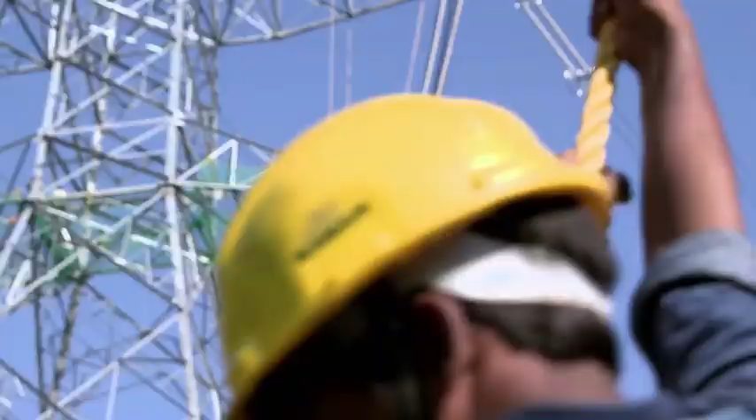Over 3,000-meter high mountains, 1,150 transmission towers, over 5,000-kilometer long aluminium conductors, one helicrane, $450 million, and the impossible deadline of just 36 months. It will take the most out of the men and the machines to brave the wind, snow, storms and slopes,

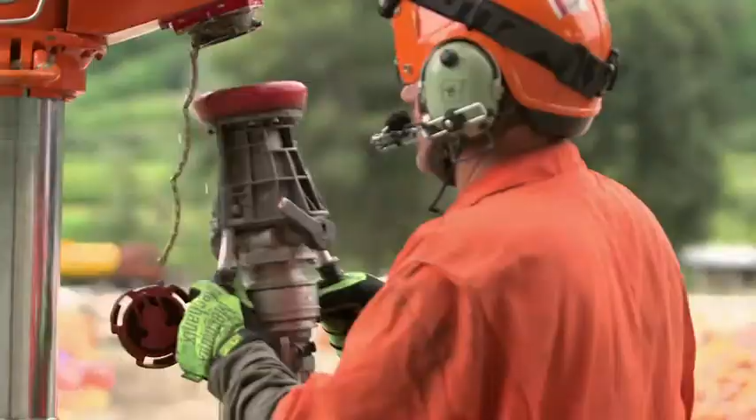and to bring light to some of the highest villages in the Himalayas. This is the ultimate joint venture between man, machine and mountains. This is the beacon of hope and light. The corridor to Kashmir.

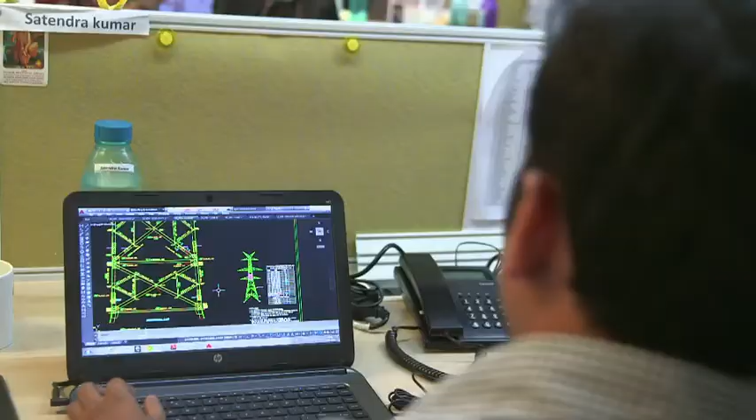India's northernmost state, Jammu and Kashmir, surrounded by the magnificent Pir Panjal Mountains. These steep slopes are an impediment to any construction project. But now, a team of designers, engineers and construction workers has decided to take on the challenge and forge a 415-kilometer long transmission line and bring reliable power to Kashmir.

On an average, around 12 million Kashmiris suffer almost 70 days of blackout in a year. During winters, temperatures can plunge down to less than -13 degrees, making life difficult. Currently, the old transmission corridor runs from Moga in Punjab and ends just ahead of Jammu at Kishanpur. Landslides, rockfalls and heavy snow often disrupt the old transmission line, plunging large parts of the state into darkness.

But electrifying Jammu and Kashmir is a tough challenge. The government has just 2 bidders for the project. The mountainous terrain is tough to conquer. During winters, the high snow and cold winds make working impossible, and security issues often plague the politically volatile state of Jammu and Kashmir. STERLITE Power, with a promise to deliver the project 12 months ahead of schedule, wins the bid.

No one wants to address the tough challenges. No one wants to connect Kashmir to the mainland with a 400 kV line over the Pir Panjal range. And these are some tough challenges that we are accepting, because we believe that if no one does them, then we'll never have a real economic energy market in our country.

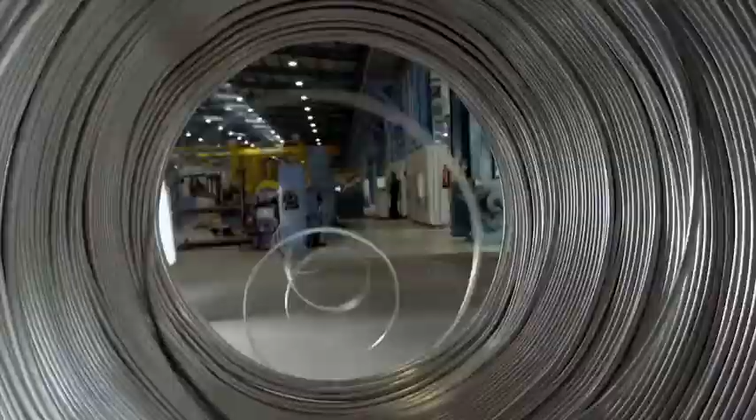The company is just 6 years old and has been in the business of connecting towns and villages through power lines. Its experience of manufacturing cables and conductors and of building power lines from Maharashtra in the west to Assam in the east will certainly come in handy.

But the geography of Kashmir will be the biggest challenge for this young company. We asked ourselves that is there no way to do this project in, let's say, half the time. See, it was very easy for us to take the full 6 years. In fact, if we took 9 years, it would not be unheard of. But where's the fun in that? We said that let's take this project, let's take it as a challenge that we have to deliver electricity for the people of Kashmir in as little time as possible.

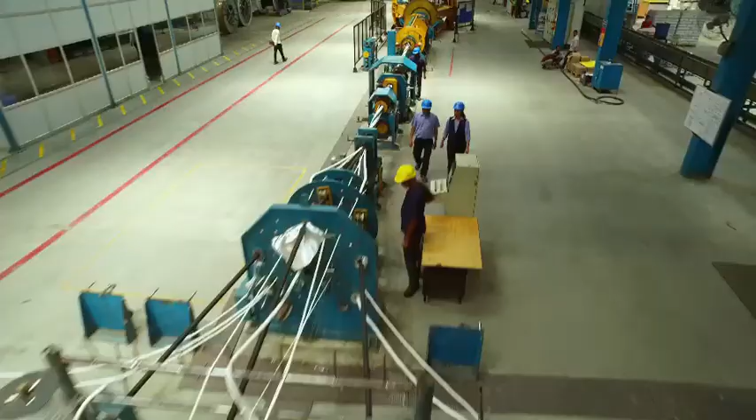This new corridor to Kashmir will consist of over 5,000 kilometers long heavy gauge conductors running in 12 parallel lines. These overhead high power transmission lines carry a fearsome 400 kilovolts of charge and will rest on over 1,000 tall, heavy reinforced metal transmission towers.

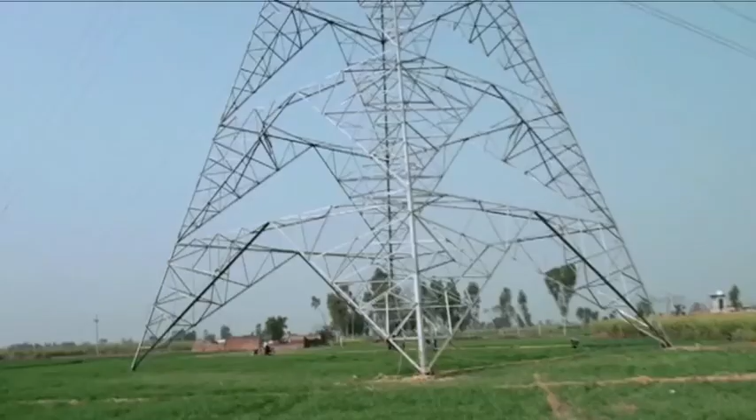The first phase, the Jalandhar-Samba line, is being built predominantly on flat land, and it's plain sailing for the team, who lay out this section in record time, 12 months ahead of schedule. But building the remaining two-thirds is the Herculean task. The Samba-Amargarh line has been built on these treacherous slopes of the Pir Panjal range. As far as the planning is concerned, the first thing goes the identification of the location.

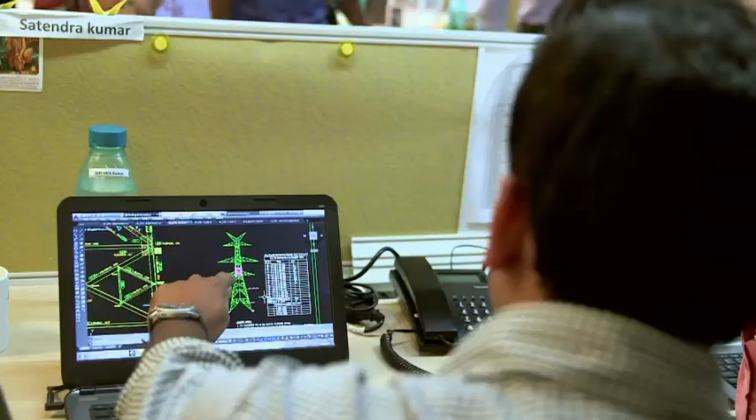Once the location is decided, the type of tower for that particular location is considered after engineering. The design team has to factor in the elevation of the slopes, the altitude, and the snowfall pattern, and tweak the design and weight of the towers.

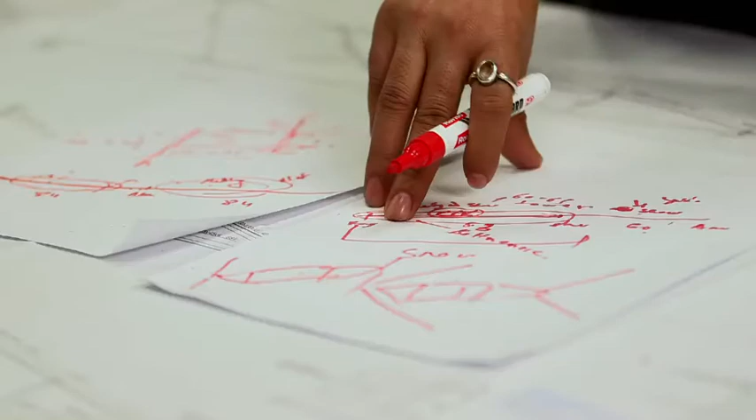As we're talking from Samba to Amargarh, there are 4 sections we've divided: Akhnur and Rajouri, then Shopian, then to Amargarh. In these 4 sections, this is the portion which is non-hilly and without snow, this is hilly without snow, this is hilly plus snow, and this is semi-hilly with snow.

So in this hilly and semi-hilly snow area, we need to design the towers in a way that we can club this together. The team is using 4 different types of towers to match the topography and the angle of the slopes.

For this project, we considered the wind zone at a higher level - the wind speed in the area is 39 meters per second, but we considered 44 meters per second. We also increased the snow thickness consideration to 16 mm on the conductor and tower material, generally it's 10 to 12 mm. We kept it on the higher side, which automatically covers the seismic load on the tower, since it's a pin joint structure and the seismic loads are easily transferred to the ground.

In the complete line, we are using more than 1,000 towers through different geographical areas. Some are in heavy snow zones, some in medium snow zones, and some in non-snow zone areas. In heavy snow zones, we use grade C material and extra weight, so our tower will not be brittle in negative temperature, and will not buckle in any condition.

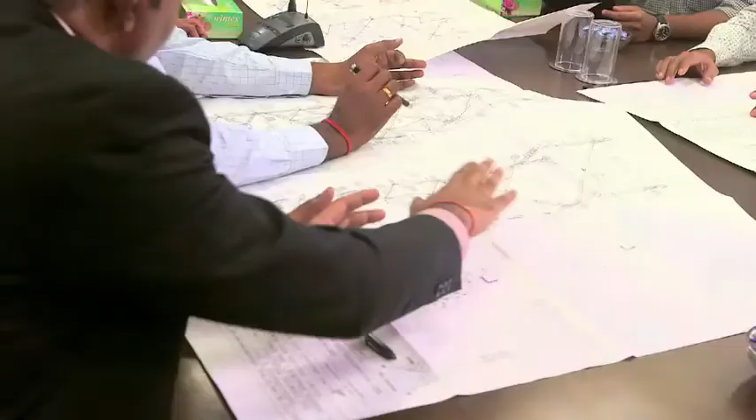The team meets in the boardroom to finalize the plans. The altitude of the mountains and the snow conditions are the big impediments to the project.

Pratik Agarwal, Sterlite Power's Chief Executive Officer, is taking keen interest in the project. The reliability, not only for 35 years, at least 50 years this line can serve Jammu and Kashmir and the nation.

But there is a huge operational problem to be overcome. Considering the size of the project, I think the material movement for the foundation as well as tower erection will be the biggest challenge.

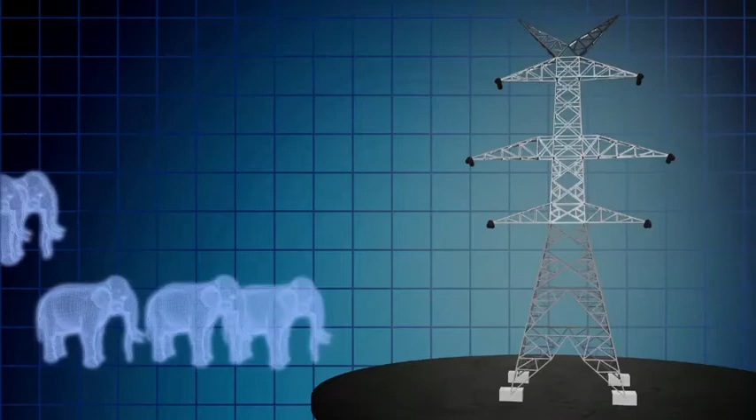How is the team going to get the material up the mountains? The traditional method of using mules to shift material is slow and cumbersome, and each transmission tower can weigh a mammoth 46 tons - that's like hauling 9 reluctant elephants up the slopes.

You will be surprised to note that 5,000 mules working 24/7 was in all the consideration. Being a project director, I was thinking, what's happening? Well, there is planning for the man, material, jeeps, tractors, excavators - these are required. But the mules? The land route with sometimes non-existent roads is too time-consuming.

So the engineers look to the air for a solution. This is perhaps the most difficult transmission project ever undertaken in this country, and we believe that if we can execute this project in much faster time than it has ever been executed, we can execute any other project in this country.

From this value proposition, what we want is to bring in the best technology in the world to complete this project within the time frame. From this perspective, we want to bring in a helicrane, because after scanning all the technologies available in the world, I believe this will add the most value to our ambition of executing this project.

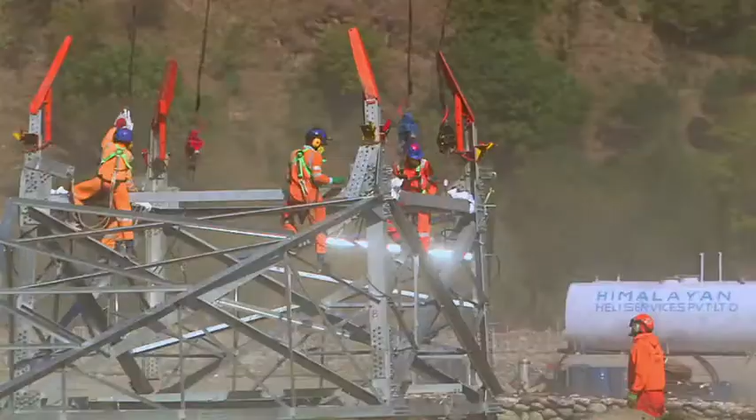Sterlite Power has taken a calculated risk and ordered a helicrane from Erickson. The helicrane, or S-64, is a monster helicopter that carries an enormous weight of up to 9,000 kilos.

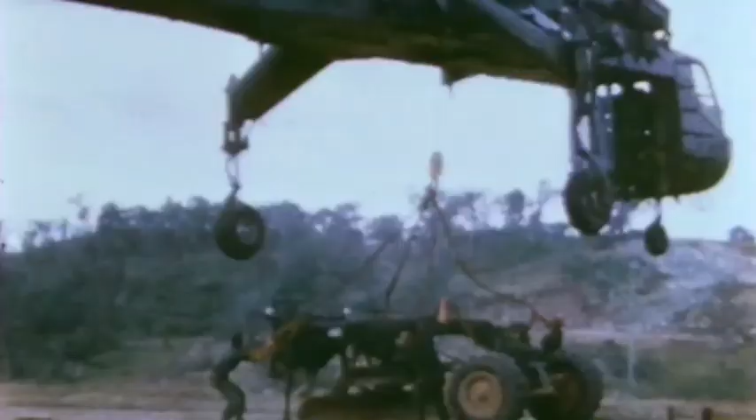Its forerunner, the CH-54 Tarhe, a Vietnam War hero, was invented in the early 60s by Sikorsky Aircraft and used by the US Army.

Today, the technology is primarily for civilian use, and Erickson Air-Crane owns and operates the largest fleet of S-64s, leasing them out for mega building projects worldwide.

Can the helicrane be the answer to conquering the slopes of the Pir Panjal? And can it help build a corridor in record time before winter falls?

The biggest challenge that we have is working on these humongous mountains in only 3 months. We have only a working window of 3 months, and the only way to do so much work is by using the technology of aviation - that is how the very idea itself was one big challenge.

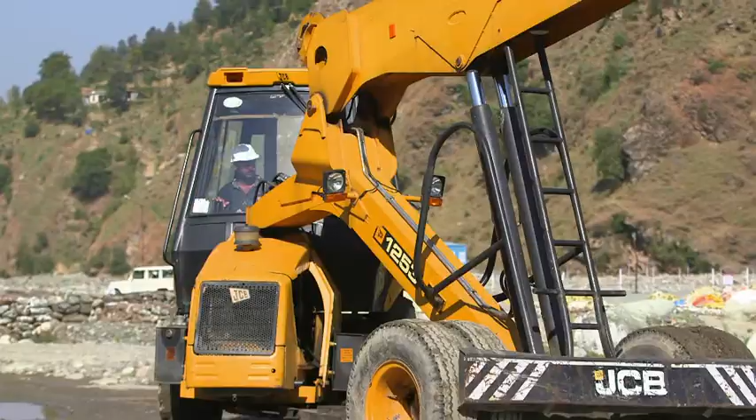Action now shifts to Bafliaz, near Poonch, very near the line of control. This is the operations base from where the team hopes to conquer the Pir Panjal range. Security is tight, as this is geographically the widest place in the area, with proximity to the road, so the entire stock inventory can easily be brought in. The area also has a high presence of Indian forces, giving the base extra security. The team has all its equipment here: cement, sand and gravel to lay the foundations of the towers, and a whole host of metal stubs that will form the legs of the transmission tower.

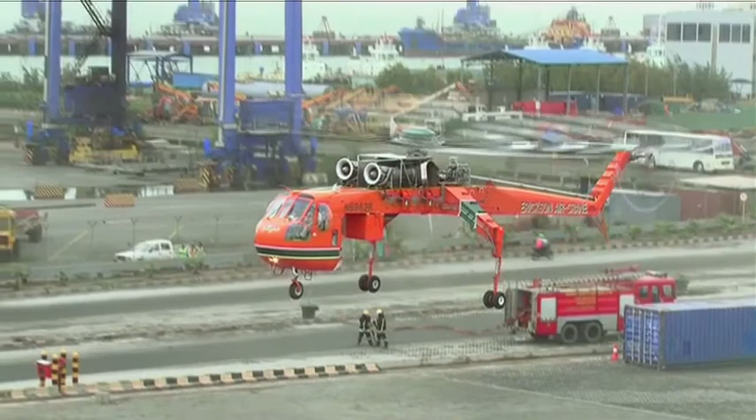Meanwhile, far away at Mundra port in Gujarat, the Erickson helicrane is finally off the ship. It's come from Australia. The flight engineers check the machine, and hey presto, it's liftoff and time to head towards Kashmir.

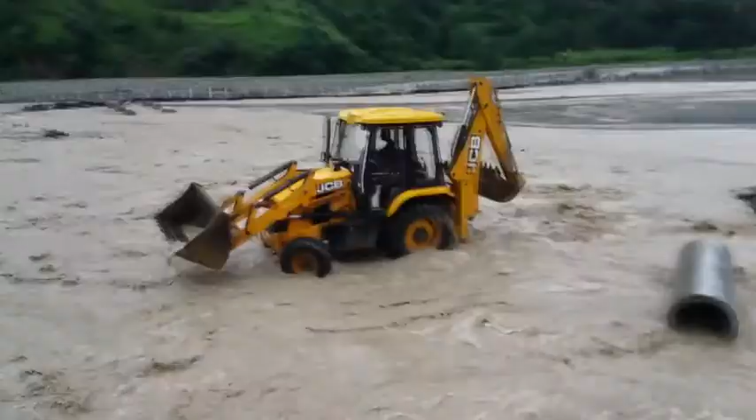But back in Kashmir, work comes to a standstill. Disaster has struck the operation headquarters. With the nerve center down, precious time is being lost.

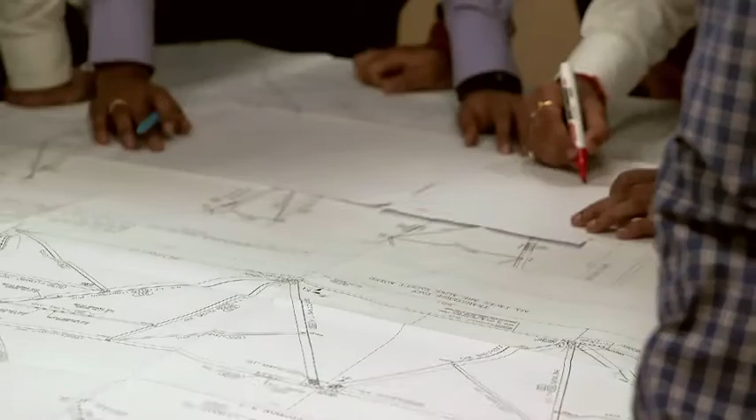Connecting Kashmir to the central electricity grid is a mammoth undertaking. This team has hired a helicrane to help conquer the Pir Panjal mountains. But days before its arrival, disaster strikes.

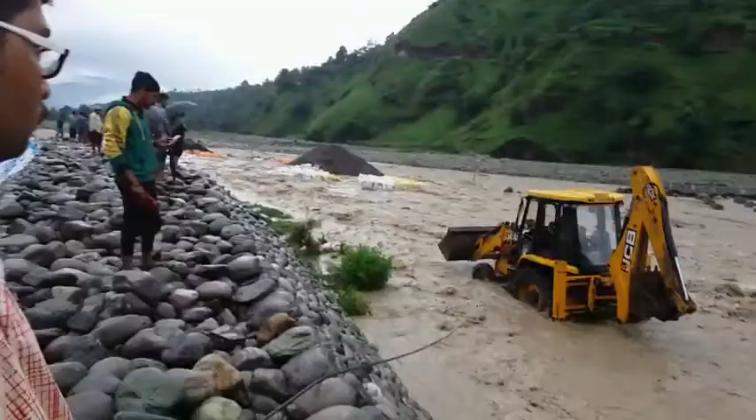The effort to bring power to Kashmir has suffered a setback. A flood in the adjoining river has inundated the operation headquarters. The months-long hard work in setting up the base has been washed away. The crew is safe, but the entire yard is a complete mess. What was once a parking zone is now a river.

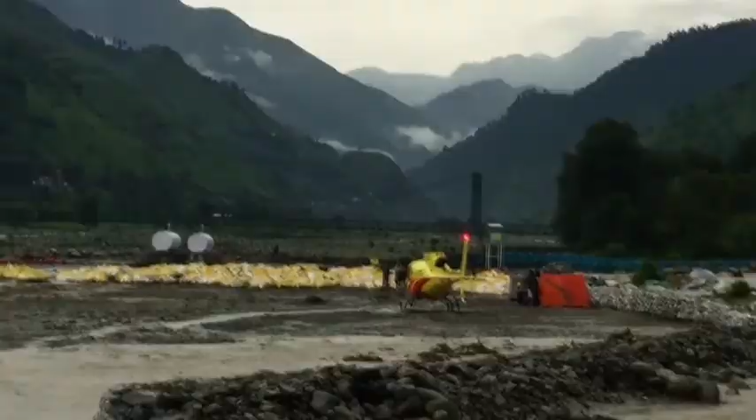The team does its best to salvage what they can. The living quarters are no longer habitable. The B-3 helicopter, on a trial run, is quickly dispatched back to Srinagar. The crew don't want to take any chances.

The challenge was to make this yard available for the Erickson by July, and we had a flood in between, so I have to remake the whole yard.

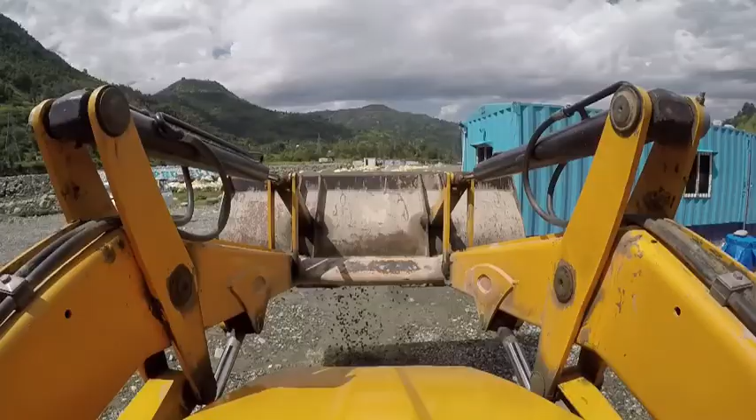Meanwhile, the clock is ticking away. The team reviews the flood damage and decides to set up base at the same place. The operation headquarters has to be up and running before the helicrane arrives. This team has a deadline to meet and no time to waste.

In a matter of just three weeks, the yard is reconstructed. The team invites the local army commander for the inauguration. The operations base is now ready to welcome the first sortie of the heli crane.

This is the magnificent heli crane. She's named Olga, which means holy in Russian. She looks like a slim grasshopper, but she is no lightweight. She is powered by twin heavy lift engines.

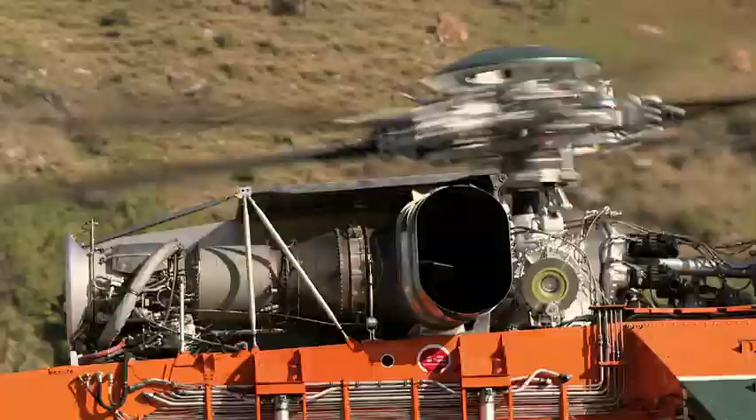She doesn't come alone. She's followed by her support crew in the B-3 helicopter. This is the first time a sky crane has been used in a construction project in India, and the team believes that she will be a game changer.

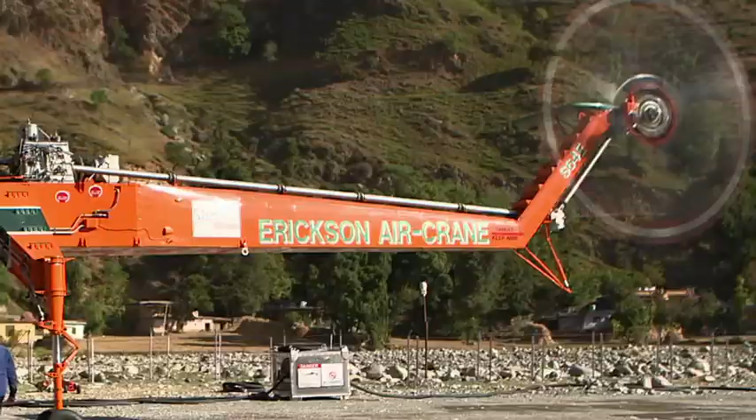The Olga is an experienced workhorse. She has over 54 years of experience working across the world, and now she intends to queen over the Pir Panjal range.

The Olga comes at a steep price and costs thousands of dollars per hour. Clearly, the team believes that the price is well worth it. It is one of the largest projects being financed in the state of Jammu and Kashmir in the history of India.

So it was fairly difficult, and the technology and the complexity of the terrain that we had to go through made it even more difficult.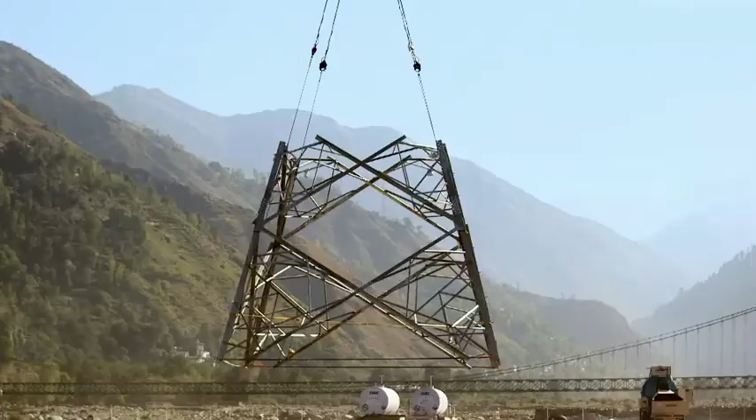This sky crane is the team's secret for beating the project deadline. It can lift up to an enormous 8,000 kgs of weight, compared to 40 kgs per man per day.

We're here in Bafliaz, India, to do a power line construction project for STERLITE, and we're in the process of moving steel, concrete, and gravel to the tower site.

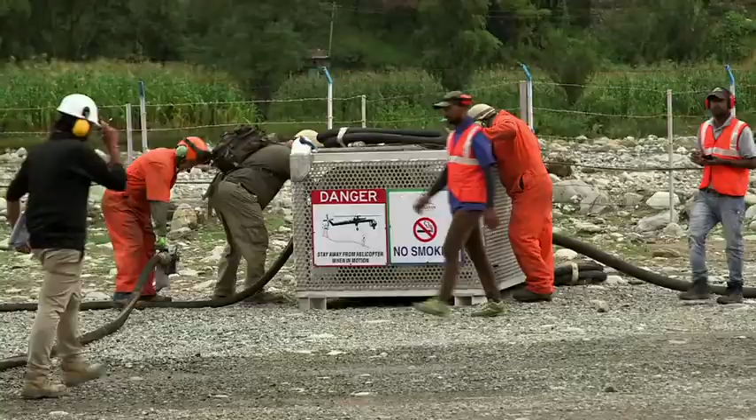The sky crane comes with a highly specialized crew of 10 people, pilots and engineers, plus a crew who will manage the ground operations. The Erickson crew is an experienced lot, but it's clear that working on this project is not going to be easy.

The ground team needs to learn what it means to work with the heli crane and quickly put systems in place.

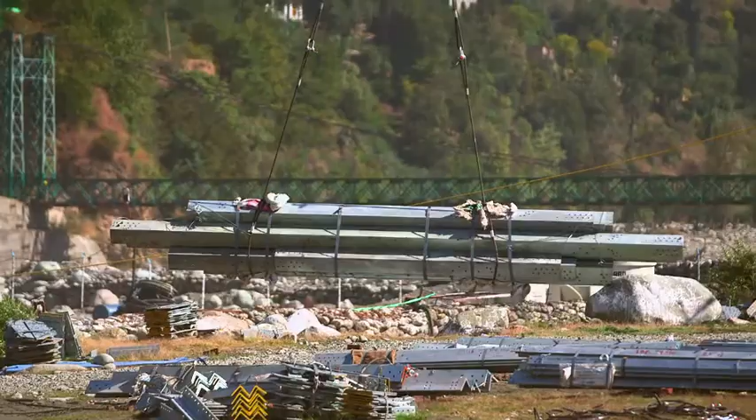At every landing and takeoff, the powerful six-blade rotors of the heli crane kick up a veritable storm, so tankers are called in to sprinkle water to keep the dust down, for visibility is key.

The noise of the rotors is deafening, and the safety officer keeps a check to ensure that everyone is wearing safety helmets, goggles and ear protection gear.

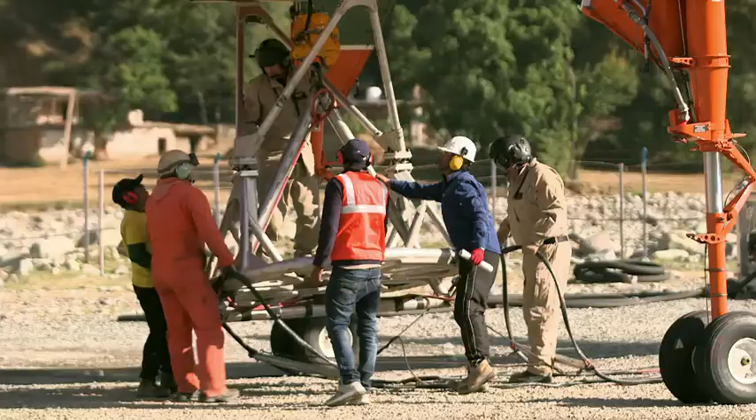The air crane comes with a variety of attachments to carry different kinds of loads, which makes carrying cement, gravel and steel an easy task.

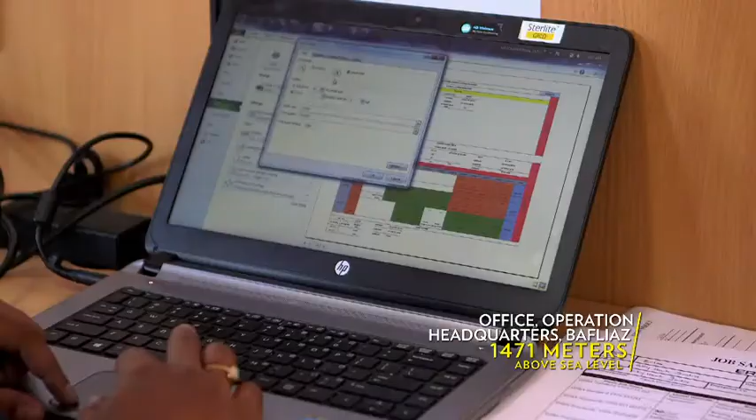Here we shift steel bundles with the help of a sky crane at locations very far from the access road. Sitting inside the site office in a converted container, the team plans each sortie carefully, keeping in mind the latitude, longitude of the drop zone and the temperature of the day.

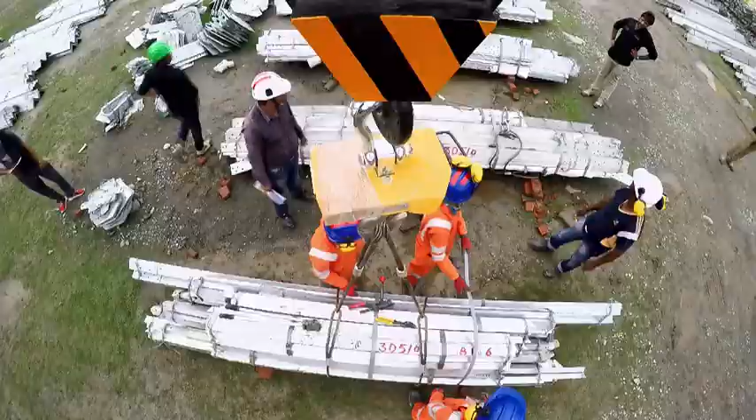Hourly weather updates to check the wind and visibility in Srinagar, Pir Ki Gali and the drop zone is crucial in deciding the weight for bundling. Today, the yard crew has been asked to bundle all material under 4 metric tons.

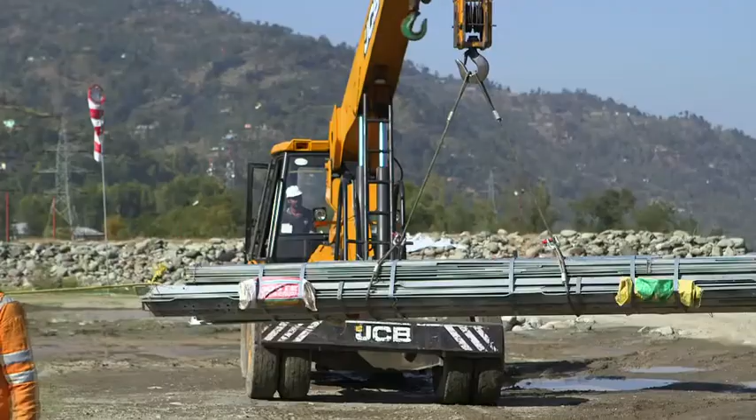But as the weather deteriorates in the afternoon, the calculations have to be revised. The hard work of the morning will have to be redone and the bundle weight recalibrated and remeasured for the next sortie. Nishant Gupta, Sterlite Power's project manager, knows that ignoring the weather or the weight changes can jeopardize the safety of everyone aboard the heli crane.

Looking at the terrain, because there are a lot of challenges with the machine, it cannot lift more than 6 metric tons on these terrains because it's from 8,000 to 12,000 feet.

Then we changed our plan from erection to more of bundle shiftings, or maybe we did much of dry material shiftings plus steel bundles. So we changed the entire setup, and our target was like 4,500 metric tons. As on that, I think we are targeting 4,200 metric tons, or maybe we can do more than that.

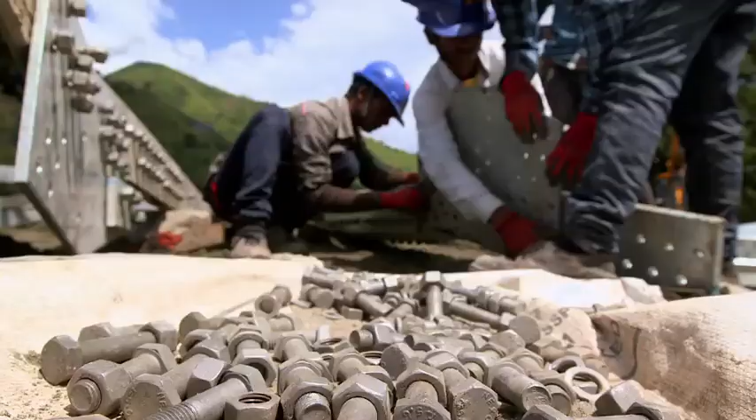It's September. Weather is disrupting work at the sites. Today, the team at the operations yard has been waiting for the sky crane since early morning. But bad weather at Pir Ki Gali Pass means it's stuck at Srinagar.

Meanwhile, 62 Romeo is going to take off, and by the time it gets to Srinagar, that means we'll be ready to work by 10, 9:30, 9:45. But 9:30 comes and goes, and there is no sight of the sky crane.

Helicrane is coming from the Pir Ki Gali, that is 12,000 feet altitude. Some days it's not coming because the weather condition is bad.

Major constraint is the weather condition here, vulnerable weather condition. If you look in the morning, it will be a very sunny day. After 12, it will be very tough, cloud will be there, and the visibility will be less for the construction. Weather on the Pir Panjal range has a lot of local variations.

Sometimes the wind conditions or visibility change rapidly, making the team scrap their entire plans for the day. One of the things that we have to watch out for is the weather closing in behind us or in front of us and everything. So to be cognizant of where you're at and what the weather is going to be doing, and try to outguess it and work with it.

Safety, because you've got to be safe. If you can't see what you're doing, don't be there.

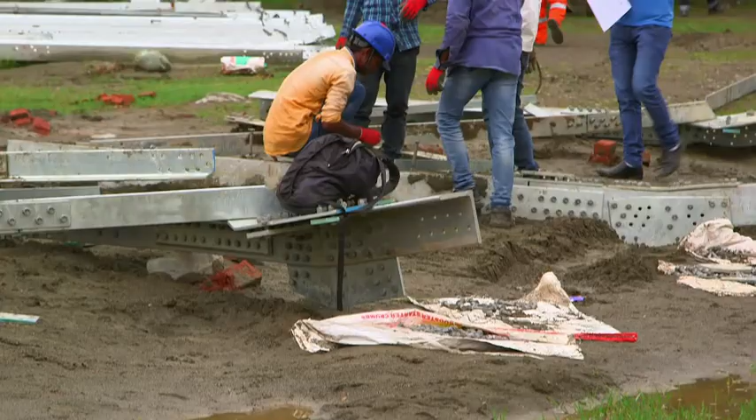By mid-September, work on the project nearly comes to a halt. The monsoon winds are playing spoilsport, and the helicrane has been stuck at Srinagar airport for the last week. The weather here has been quite difficult. For the last week, we've been shut out.

This time of year, I understand, in this area is quite moist. We get a lot of thunderstorms building up and a lot of fog, which we're unable to operate in. The Erickson support crew at the yard keep themselves busy, tinkering with the Olga and making sure she is in perfect shape.

The problem we have right now is the weather's not cooperating. As far as being able to give an actual time, I can't. If we get some good days, Sterlite will be able to see what we actually can do, how much production we can put into a day. I look forward to that day. I hope that day is tomorrow. But to give an actual time on when we'll be done, I can't give that.

Mother Nature. The terrain makes its own weather, and the weather is one of the things that we have no control of, and we have to work with the weather.

The team is under pressure. They need to finish before winter approaches with its snowfall and windstorms. The team has to win the battle against time, terrain and weather if they are to keep the promise and complete the Corridor to Kashmir project ahead of time.

The heli-crane has hastened the building process, but it's been out of action for the last week because of bad weather. With work stalled, the team is under pressure.

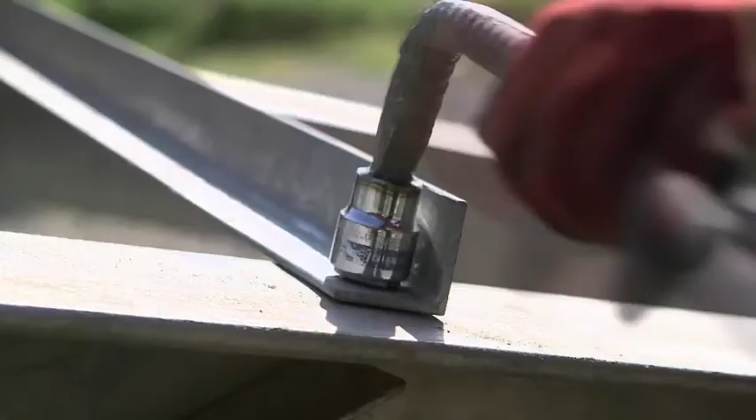It's October. With the monsoons over, work on building the transmission towers gathers full speed. The team will have to race ahead to meet their deadline.

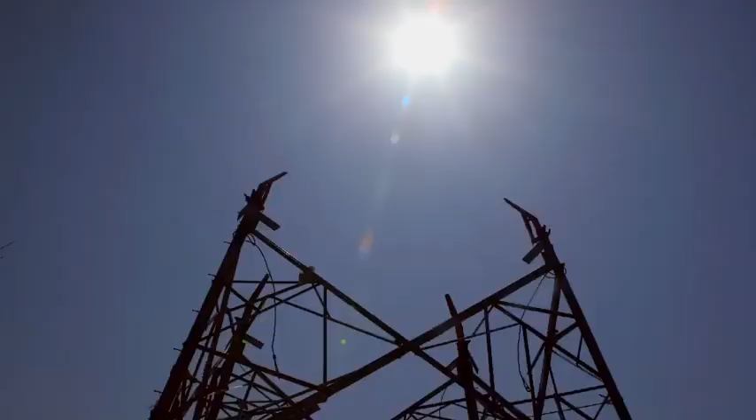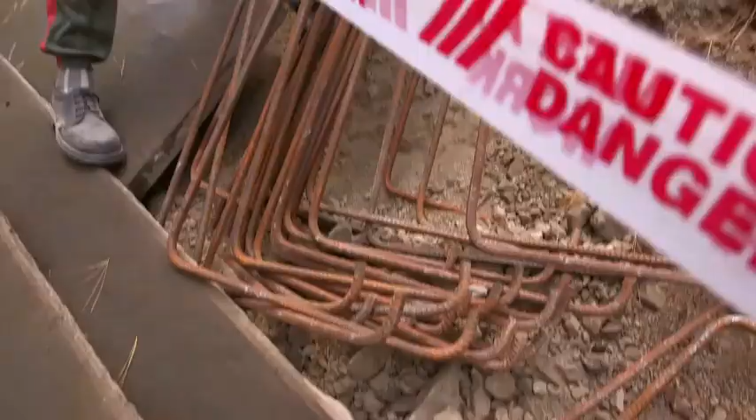Work on the hillsides of the Pir Panjal range is at different stages of construction. The team has started working on multiple sites. At some sites, the foundation has been dug up and the rebars are being laid, while at others, the legs of the transmission tower are already up.

The heli-crane, with its supporting B-3 helicopter, is busy making daily runs across the mountains, ferrying material to these multiple work sites every day.

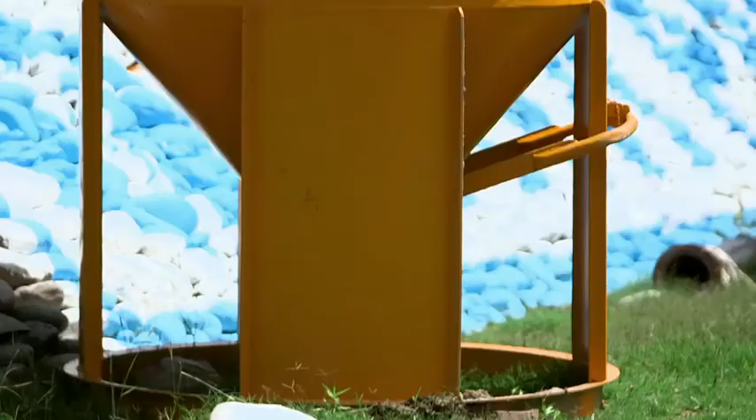The Erickson team has brought these special concrete pouring buckets from the United States. Each of these buckets holds over 6 metric tons of concrete, which helps to speed up work at the site.

But there are impediments to be overcome. It's been a learning curve for the Indians and the Americans to get a smooth working relationship going. This is completely new to them. They've been doing it all by manpower and mules and horses for so many years that this is a huge change. So we're not asking for something a little different - we're asking for something completely different.

The heli-crane is a game changer, and the ground crew has had to quickly learn how to work around the tight, precise schedule of this high-tech workhorse. We like to really get things done, get it done quick and hard. And sometimes we have to realize that we have to slow down just a little bit and say hello, you know, and get to know the people a little bit better. And then they get to know us too.

To keep pace with the monstrous machine, the ground crew required a whole host of manpower which could work with the needs of the heli-crane. We don't have in India the skilled manpower, especially for heli-crane erection. For that, we have recruited a special kind of fitter who was specialized for that. We have trained them especially for heli-crane operation.

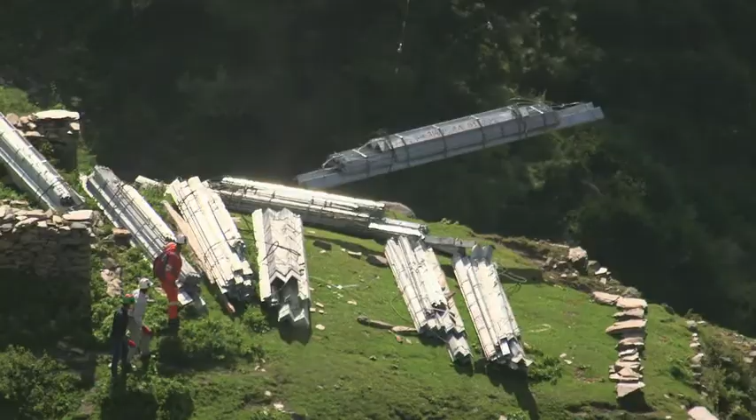Language is the other major barrier. Communication between pilot and ground crew is crucial in making an error-free drop. Any mistake in understanding can mean a drop of 4 tons of steel in the wrong place and certain death to anyone standing below.

In some places, cell phone connectivity is poor and wireless communication not allowed due to security reasons. The team has got around the communication problem by teaching the laborers how to use hand signals effectively. And marshalling with flags saves the day.

We had to train our drop zone crews. We trained them how to marshal an aircraft, how to do signaling.

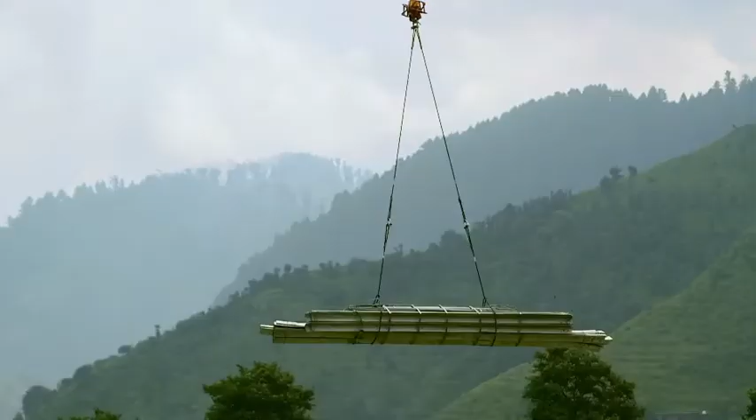The heli-crane has speeded up the construction process from days to hours. But transporting heavy loads by air has its own risks that many local villagers don't understand.

The people of India have some problems at times understanding that when we're asking them, please don't go on the bridge or while we fly over, they don't understand why we don't want them on the bridge. We don't want them on the bridge because if one little bolt or one little rock falls out, we could injure someone or kill someone. We're not trying to disrupt their way of life. We're trying to protect them.

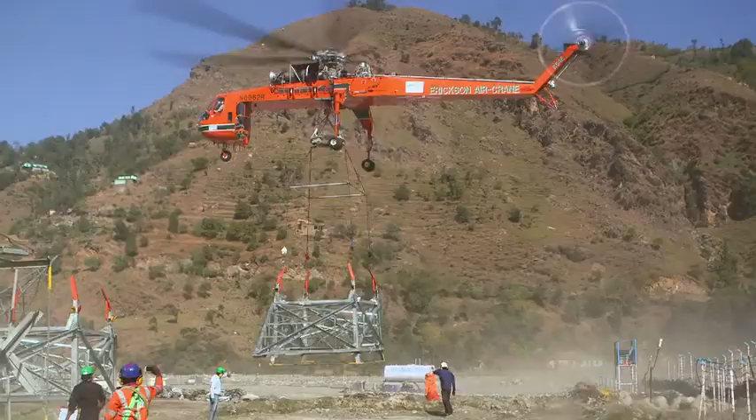Safety first - that is the motto of this project. The heli-crane crew follows US flying regulations, which restrict them from flying over inhabited areas. So to avoid villages, the pilot often plots a longer route to reach the drop zone. Besides the US safety rules, the heli-crane crew is also mandated to follow Indian aviation rules.

The days are quite short for us because of the duty day limitation here in India - a 10-hour duty day, and that kind of hinders our operation, except for the fact that usually in the afternoon we get the thunderstorms that build up, and that shuts us down. The next day we're just trying to continue on, to catch up.

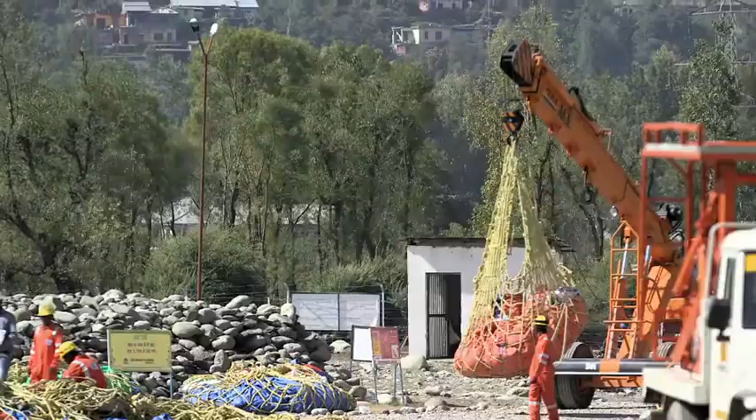This sortie is carrying sand and cement for building the base of a new tower. But as the shackle is released, disaster strikes. The light black plastic lining begins to tear and nearly gets sucked up by the rotors.

Back at Baflias, the team discusses the problem and takes a decision. Their solution is to drop the material with the netting intact and retrieve the tools and cargo nets at the end of the day so they can be reused again.

It's mid-October. Tower erection has reached a critical stage. This team, led by Jason Weber and Varun Srivastav, is heading up to oversee the installation of a transmission tower at Thanamandi. The towers are being built high on the Pir Panjal mountains, places that are not serviced by road. Everyone has to walk up a kilometer from the road head to reach the location. The nuts and bolts are inspected, and the crew prepares for the first section of the tower body the heli-crane will bring today.

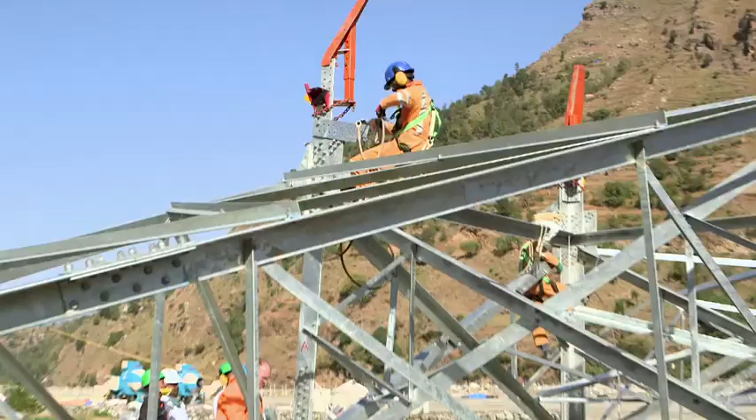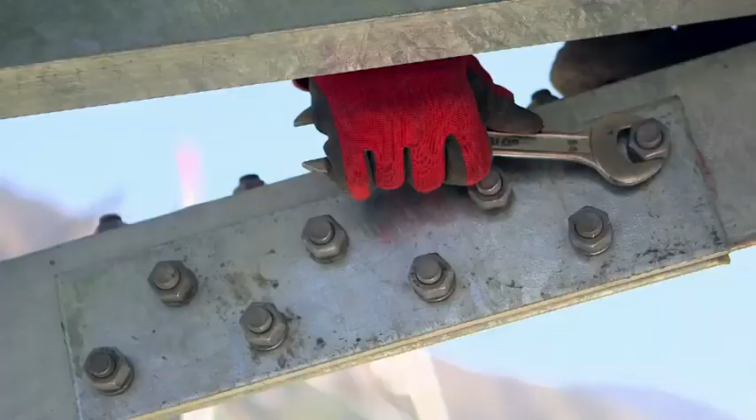Down at Baflia's headquarters, each section is topped with bright orange metal bits called banana guides to help the next piece slide in. The Erickson crew, along with yard workers called commandos, scramble up, checking and tightening every single nut and bolt. Nothing can be left to chance.

The heli crane crew are changing the lifting rig attached to the underside of Olga in preparation for the day's job. The B-3 helicopter takes off with the aerial support crew, and the heli crane gears up to pick up the section. The commando crew is ready and waiting to secure the cables, and it's takeoff time.

Up on the hillside, the tower crew wait patiently. As they watch, the section arrives.

The heli crane pilot positions the section, guided by the hovering B-3 and the ground crew. The heli crane is engineered to have two pilots, one to fly the mammoth machine and the other at the rear to manipulate the section.

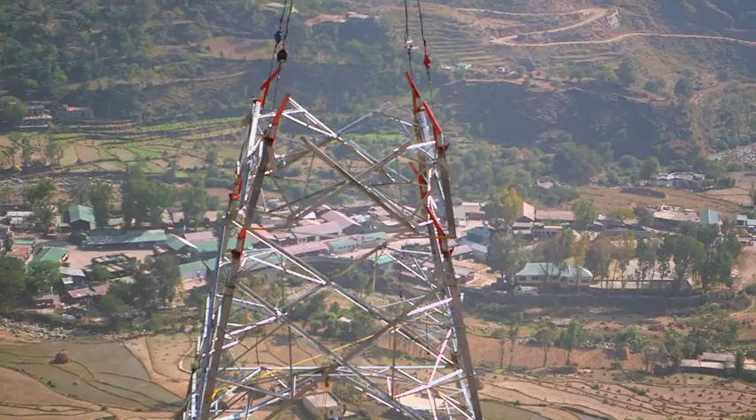As the team watches, the section easily slides onto the banana guides and slips into place. Work done, the heli crane releases the cables and flies off for another sortie.

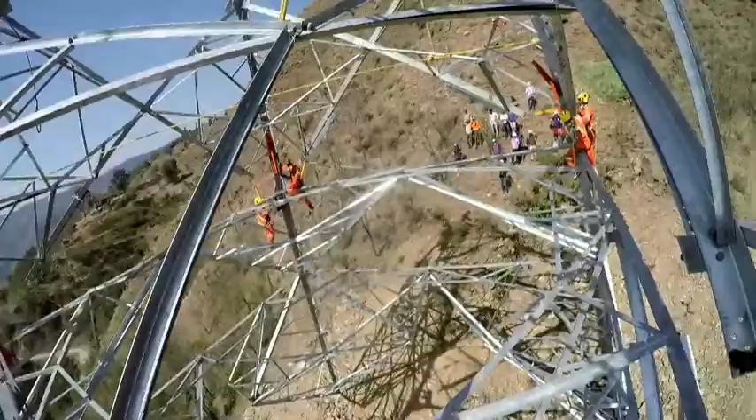The crew heads to the transmission tower to lock it into place. Jason Weber's experienced eyes have spotted a problem. A wrap around is preventing one side of the section from slipping into place. The crew runs like a well-oiled machine and is quick to follow instructions.

Under the eagle eye of Jason Weber and Varun Srivastava, the problem is efficiently sorted.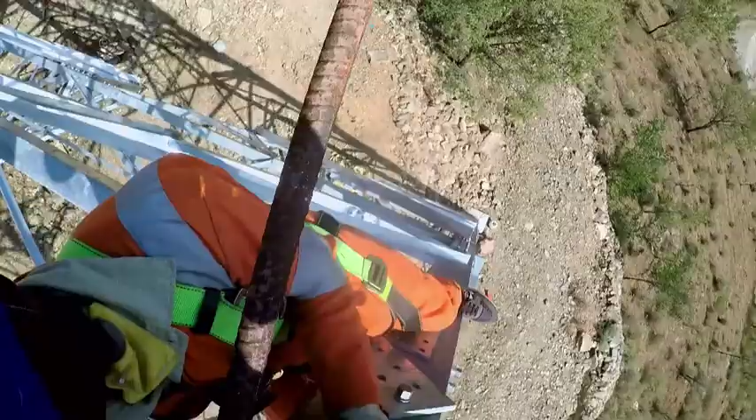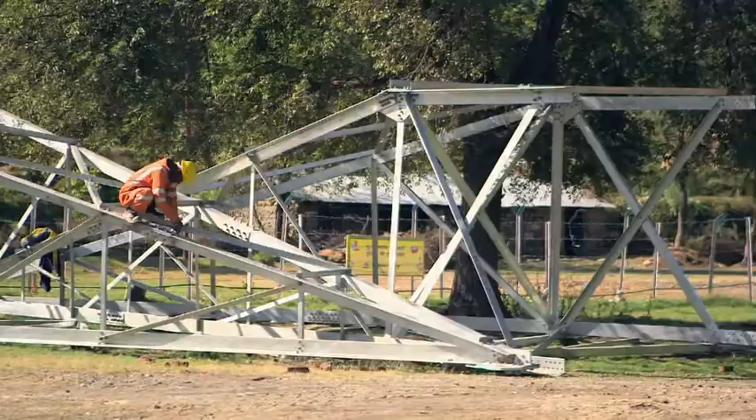At the base headquarters in Baflias, the side crossarm is given a run-over. With the headquarter ground crew satisfied, the heli crane engineers take over. The heli crane hovers over the sidearm, and the well-trained commandos quickly snap the guide ropes in place.

It's time for liftoff, but a few minutes later it's clear that something is wrong. The heli crane comes back for another try. Will it manage to pull this 6-ton crossarm, or will work for the day come to a halt?

Work on the project to bring reliable power to Kashmir is on at full swing. But the team has been grappling with the crossarm. Two attempts to lift it have failed.

There is a problem with one of the cables. It's unable to balance the awkwardly shaped crossarm. But this team does not believe in giving up. And it's third time lucky for the Olga.

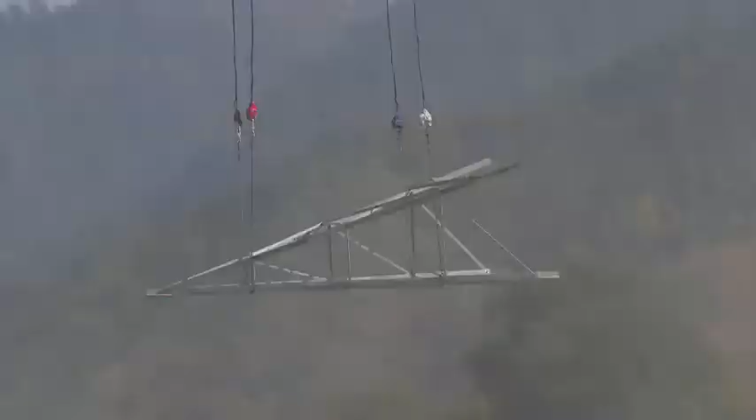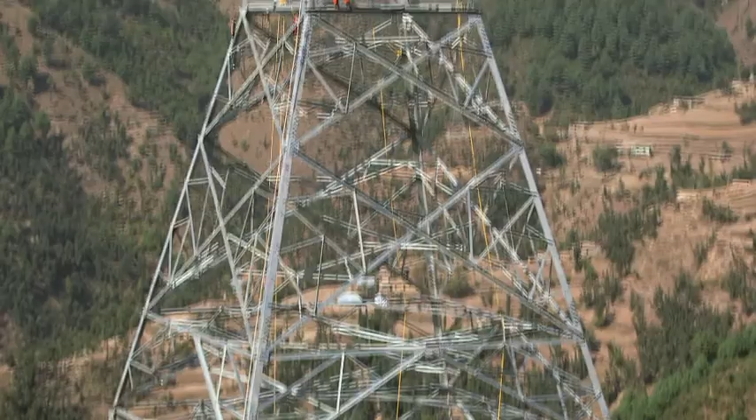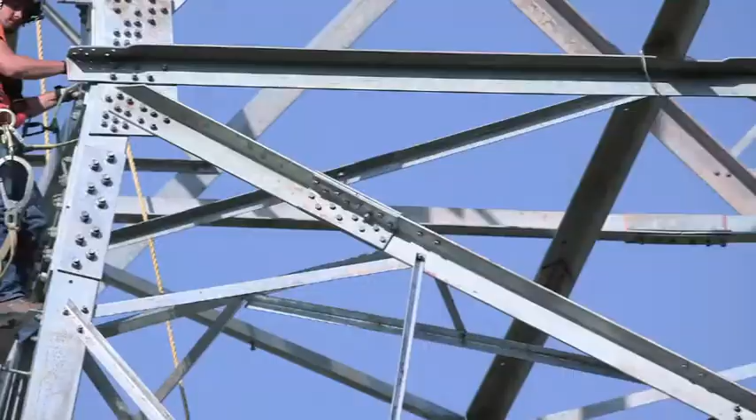Up in the mountains in Thanamandi, Erickson crew Brian Merriman and Cody Ray get ready to inspect the tower. This stage of tower erection is particularly hazardous. The sidearm cannot be slipped into place, so this team will have to remain on the tower to bolt it to the main body. Hanging from the stubs, Cody checks every bolt of the side plates and makes them secure.

Brian briefs the crew on the day's work. Push this through, hold this. Then we're going to put the spike in, okay? At that time, we want one of these guys to hold the spike so it doesn't come out. The second guy always watches. The guy on my side watches me, the guy on Cody's side watches him. If we need them, we'll tell them to come to us, okay?

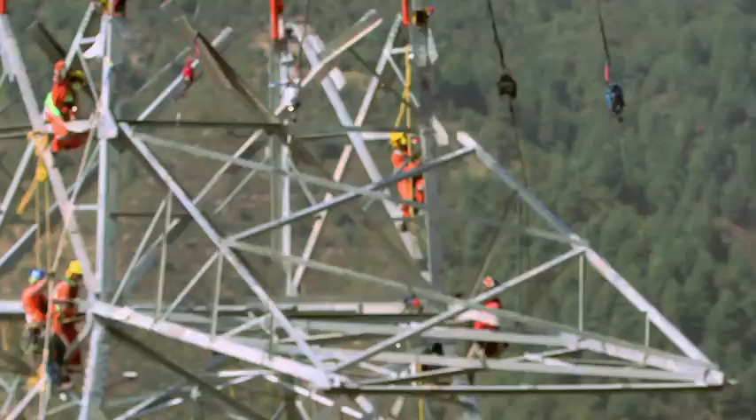And finally, the crossarm arrives. The pilot maneuvers and positions the section precisely. Attaching the crossarm is the trickiest part of erecting a tower, as the crew has to fight against gravity in the race to secure it.

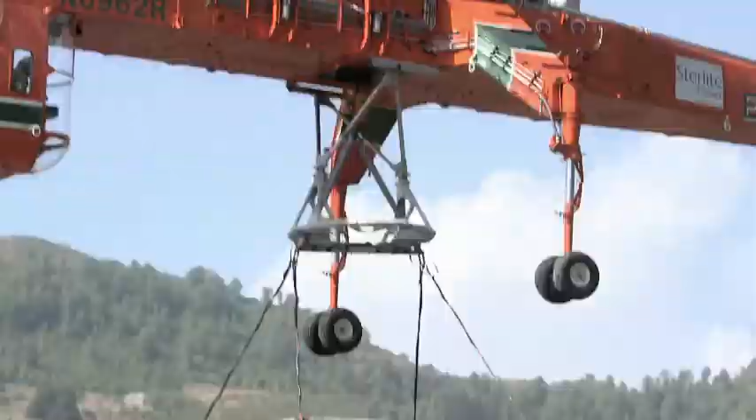This is no easy task. The heli crane hovers suspended in mid-air while the team on the tower work furiously, trying to match the bolt holes with their crowbars. The downward thrust of the rotors is strong enough to blow the men off the towers.

But everyone is securely tied and wears earplugs to mask the overpowering sound of the heli crane. The crew's tools hang from ropes for easy access. The heli crane pilot keeps a sharp lookout on the action below, keeping the chopper at an even keel.

The team works tirelessly. The arm is finally secure. It's a job well done.

For the local villagers, this is a rare sight: a first glimpse of the light that will open up countless opportunities.

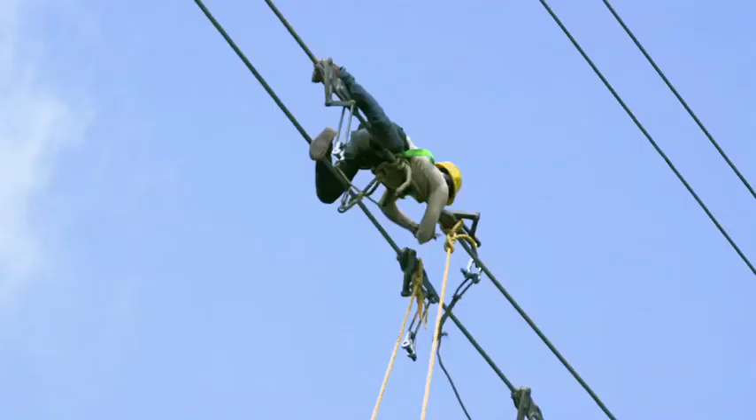Stringing the corridors with conductors is precarious business. The men on these transmission towers are working 40 meters above the ground. That's like walking a tightrope between two 14-story high buildings. The job requires precision and brute strength.

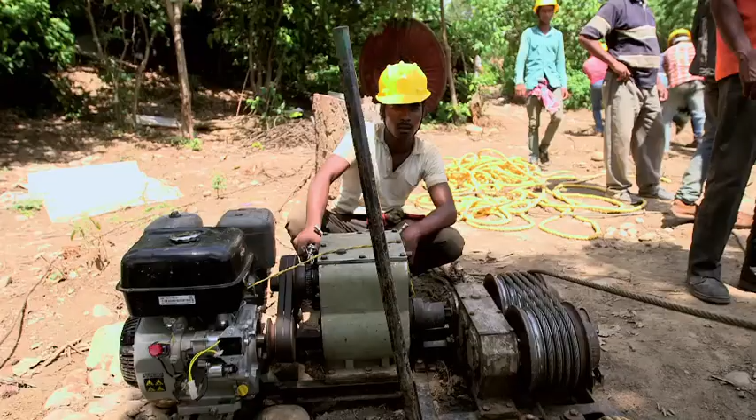Far below, gangs of workers armed with winches and ropes pull the cable absolutely tight between the towers. There can be no slack in the cable here. And all this is happening over the loop of a running road. Traffic here cannot be stopped as this road goes from Jammu to Rajouri and is used by the army and civilians alike.

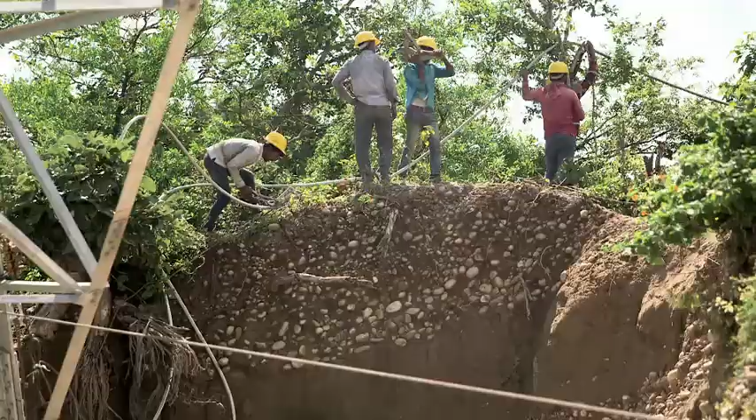High above the tree line, the workers mark the precise length of the cable before lowering it down. The ground crew cut and crimp the wire, and once done, they use sheer muscle power to heave it up again, working collectively to the rhythm of the gangmaster's call.

The crew in the sky work with a calm deliberateness and secure the cable firmly to the insulators. But the work is not over. With the safety rig on, this worker literally walks the tightrope to release the guide rope. It's a dizzying sight, certainly not for the faint-hearted.

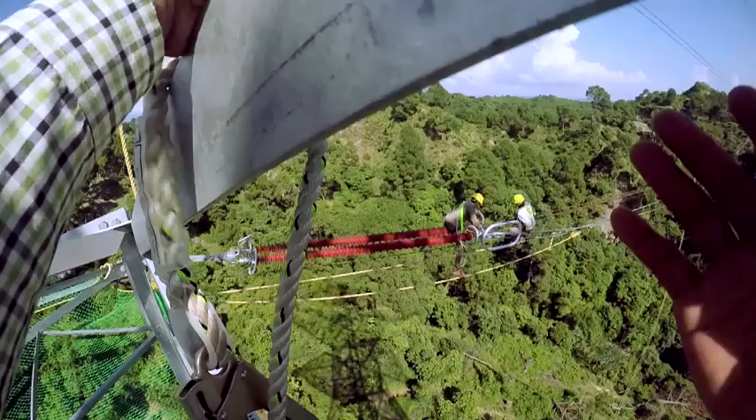It takes 5 hours to fix just one conductor wire between the towers. And this carefully choreographed, precarious dance above and below ground will be repeated 11 more times before stringing is completed.

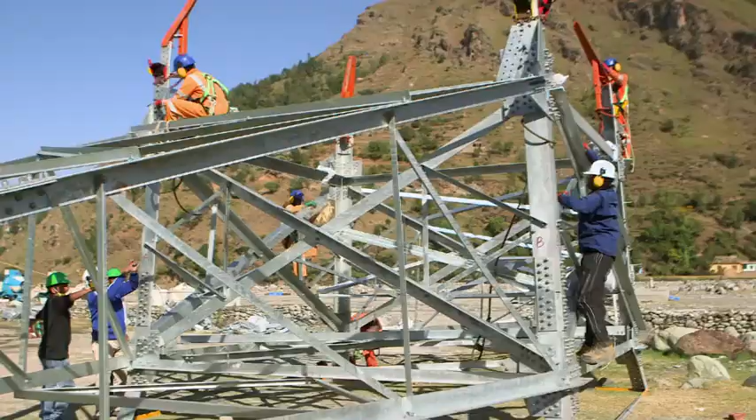It's November. The sky is clear, but there is a limited window of time before winter brings all work to a halt. Work at the operations yard is on at a busy pace, with the STERLITE and Erickson team working together in perfect synchronization.

Is there a brace right there? No, not here. Right up there. Okay, so you still have loose bolts.

At the yard, they're getting ready to send out the final piece of the tower, as this tightly knit, skilled band checks and sends out yet another section. They know it's a job well done. For project manager Nishant Gupta and Erickson's David Broadway, it's just another satisfying day at work.

The unstoppable heli crane is back again, and this time with the very crown of the tower. As the team seamlessly tops yet another tower, it's clear that this young company has done it. Today, 800 transmission towers dot the slopes of the Pir Panjal Mountains. The bold decision to lease the heli crane has paid off.

A project of this magnitude and scale has never been attempted before in our context, and therein lied the biggest challenge of bringing it from a drawing board into execution. We had to very much invent everything on our own and learn on the go. In fact, it was innovation on each and every day.

It's been a learning curve for both Team STERLITE and Team Erickson. Months of working together, shoulder to shoulder, has made them appreciate each other's strengths. Using manpower instead of machinery, but these guys have been working like dogs. They're hard workers, they want to get the job done, and they've been doing an excellent job. That's amazing. You go home, I go home. At the end of the day, that's a good day.